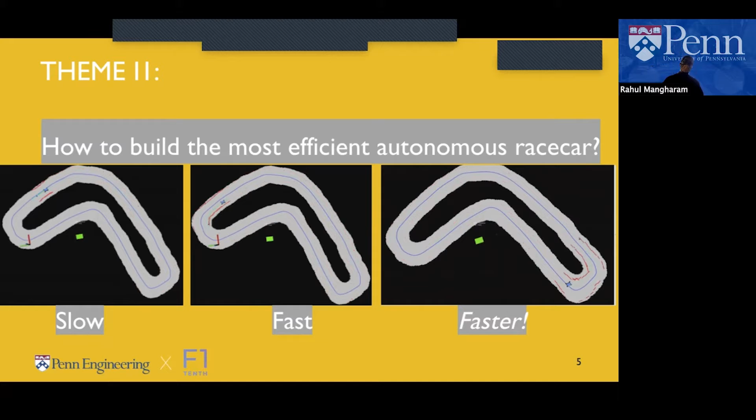The second theme is, well, in order to actually have high performance in these competitions, you have to have a very efficient autonomous race car, looking at the electrical, the mechanical, the perception, the planning, the control, the entire stack. Here we'll speak about how you automatically tune across this entire stack to come up, for a particular track, with the highest performant race car by design. This is combining the software, the hardware, the mechanics, and the racing strategy. And then how do you ensure that this transfers very well to different racetracks along the way?

Obviously, in autonomous racing, these are extremely expensive vehicles and very high stakes games. So you want to make sure your algorithms are crash proof, or to put it another way, you want to stress test and build a search engine to search for when this vehicle will crash, under what conditions, how often, and in which parts of the track. We want to stress test these planning and control algorithms with interactive adversarial agents.

In theme 4, what we look at—and this is a large DARPA project with MIT and Siemens—is that we don't always have to start a new design from scratch. We could mine previous designs. This research question is focused on how do we have AI-based co-designers for model-based design, or how do we combine previous designs to auto-complete new designs with new requirements.

So can I, if I'm Boeing, or Siemens, or one of these large companies that have been making diesel engines or turbines for many years, and I want to make a new one or a new drone, mine previous designs automatically and synthesize 80% complete designs with an 80% probability of success? How do I come up with these high performance designs, but in an automatic pipeline? This really uses a lot of machine learning to generate designs that exploit previous designs, but also explore new design qualities.

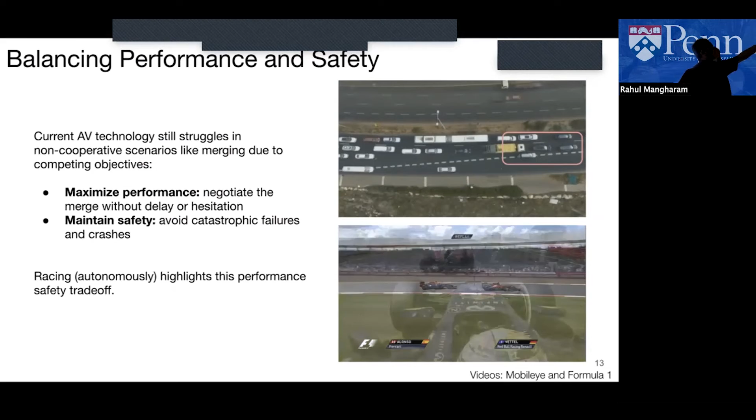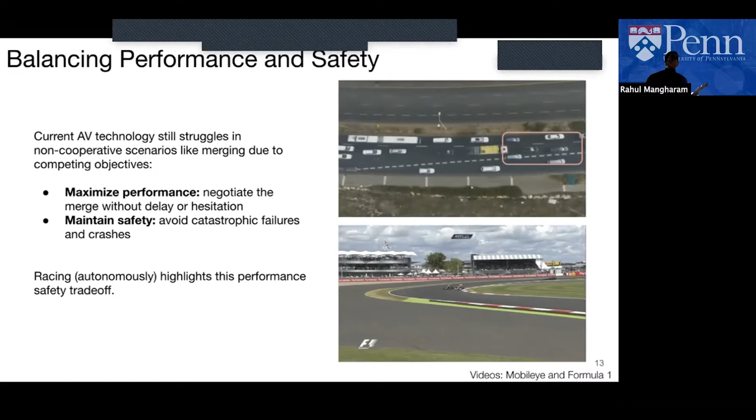If you look at our traditional example, this is a car trying to merge onto a highway, trying to get into the space between this truck and see if it can go through. It's a pretty mundane situation for us, and somehow, culturally, we're able to get through that. But from an autonomous vehicle's perspective, this is where it struggles in these non-cooperative scenarios like merging. It's trying to negotiate this merge without delay or hesitation, but if it's too conservative, it won't merge and will just stand there, which is risky. If it's too aggressive, it could cause an accident. So how does it try to do that?

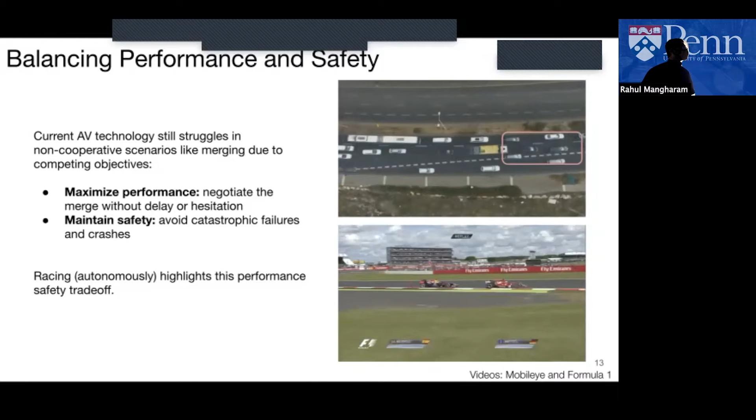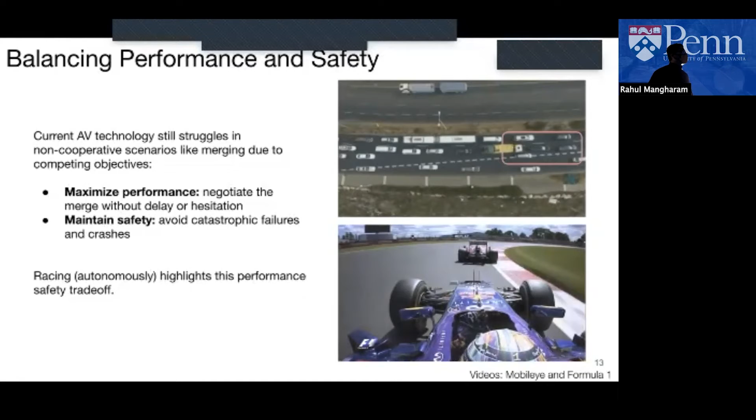But we want to look at not such a mundane situation, the most aggressive, where say we have Alonso and Vettel going extremely high speeds, extremely fast reaction times, extremely high cost vehicles, very dangerous racing at the bottom. These two drivers are trying to guess what the other driver is trying to do, and their guessing is so involuntary, it's just automatic. They have to figure out a strategy where they're extremely close to each other and they don't want to crash, but they still want to win this race.

So we focus on racing because it provides us this extreme operational environment. But the issue here is that crashing is very expensive. These are multi-million-dollar vehicles, driving at over 200 kilometers per hour, very dangerous.

Also, the sensors onboard an autonomous vehicle, like cameras, lidars, radars, IMUs, don't sense what is the opponent's intention, what is the opponent's strategy. They just sense very near-term things, the instantaneous behavior of the opponent, but not a behavioral model of the opponent. So we don't have sensors that can actually provide us that information.

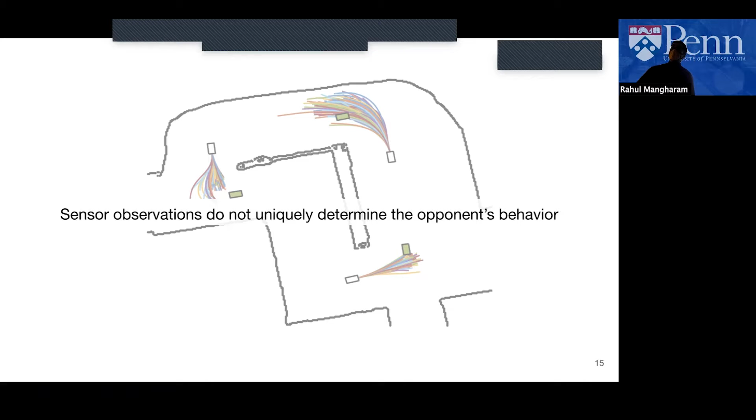What we want to know is what is this opponent's racing strategy overall and right now. We also can't just mine how these opponents raced previously, say on the Austria track or the Abu Dhabi track. Their strategies are secret, their vehicle components are secret. So we operate in a very low data regime — we can't just mine how these competitions happened in the past.

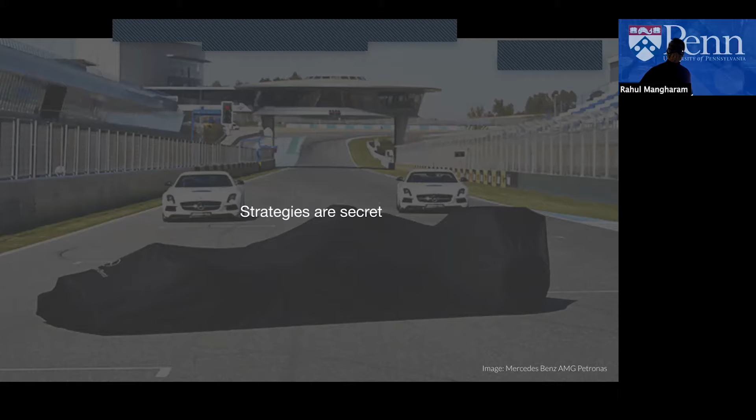So the overall idea is to learn some useful parameterization for this uncertainty set P, and then proceed as before with our RL formulation. Essentially, this is really trying to have some kind of model of the predicted behavior of the opponent under every situation as we drive. We want to parameterize that — parameterize how much progress we are making and how close we're getting to the opponent.

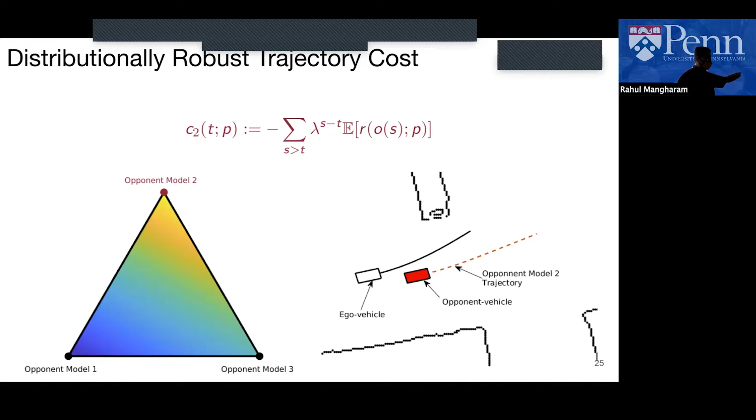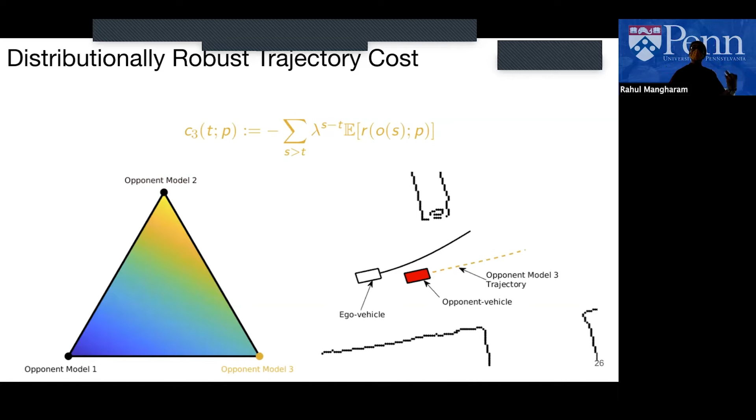And then I find the minimum cost path for that trajectory, but it's making a guess. Opponent model 2 predicts that this red agent is going to follow model 2's trajectory, and opponent model 3 has its own trajectory over here. So each of these opponent models has their own guess as to what the other agent is going to do.

But the other agent is not going to necessarily fit exactly one of the offline agents that we have. It's going to be some mixture of these offline agents, and there's also going to be some uncertainty since this is not a perfect fit. So essentially, we have this prediction in belief space, but we don't represent it just as a point prediction - we also have an uncertainty ball around that. That's what we mean by distributionally robust, because we have this ambiguity set uncertainty that we're taking into account.

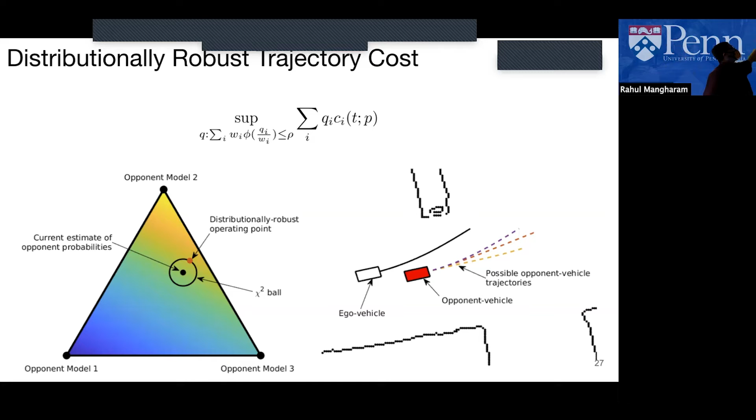And that's what we are maximizing in terms of our expectation. So essentially now, as we start to drive around, we're making a consecutive series of guesses - is it like opponent one? What kind of weighting is it of all our different candidate driving policies?

So, for example, if there are 10 possible opponents that we are racing against, and 100 possible motion planning goals that we are generating, we need to compute about 1,000 receding horizon costs just for this. Usually we are overtaking maybe one or two vehicles at a time, so it's not that high a cost here.

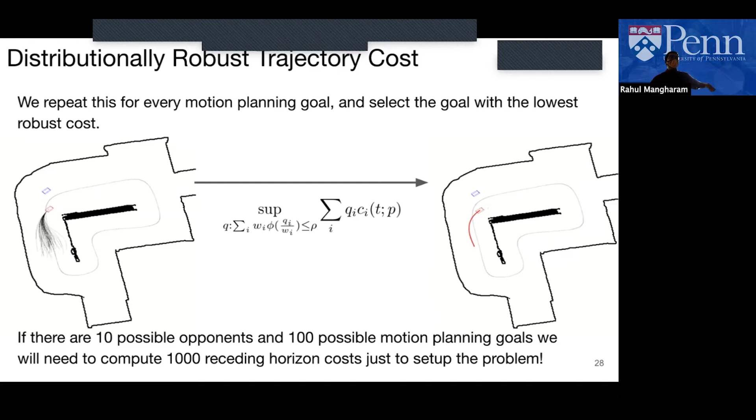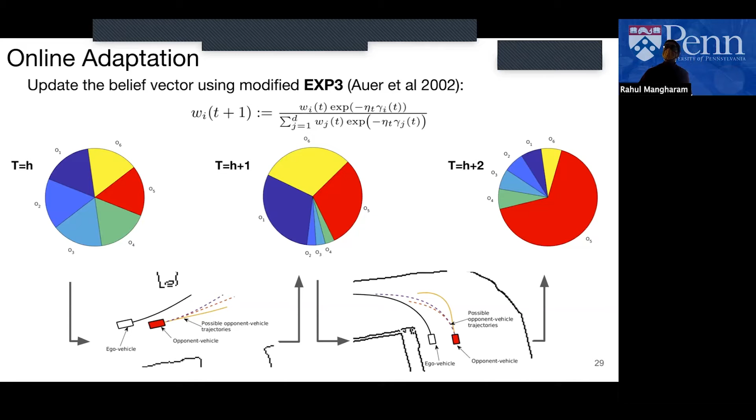What's happening now over time is that initially we have an equal weighting for all the policies that we generated offline. But as we continuously observe and correct for the weighting of how this opponent is driving, it starts to converge to a weighting of the different driving policies - say this opponent is more like policy 5, with some smaller weights for other policies. This allows us, over time with just a few observations, to shrink our uncertainty set, and then we can drive more aggressively in and around this opponent.

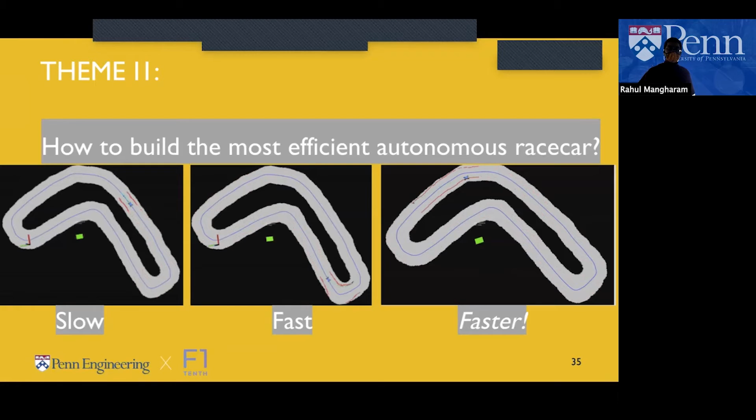That takes us to the next problem: how do we build the most efficient autonomous race car? This is based on the Tuner Car paper we had in ICRA on super-optimization for autonomous racing. That essentially means I have many different knobs—mechanical, planning-based, perception-based, and so on. These are just a few of the many knobs I have to tune this vehicle for a particular racetrack to drive as fast as possible.

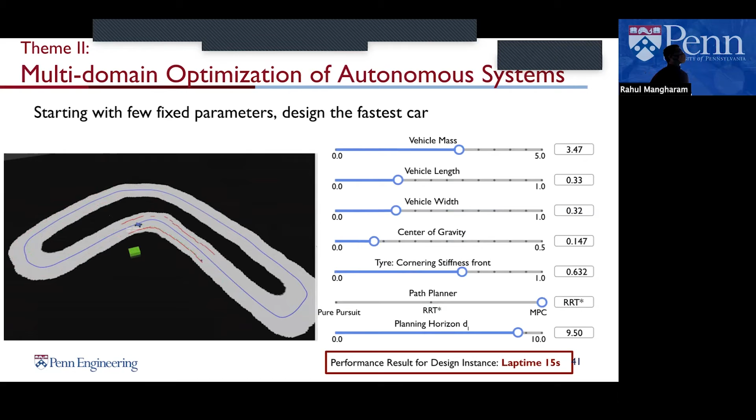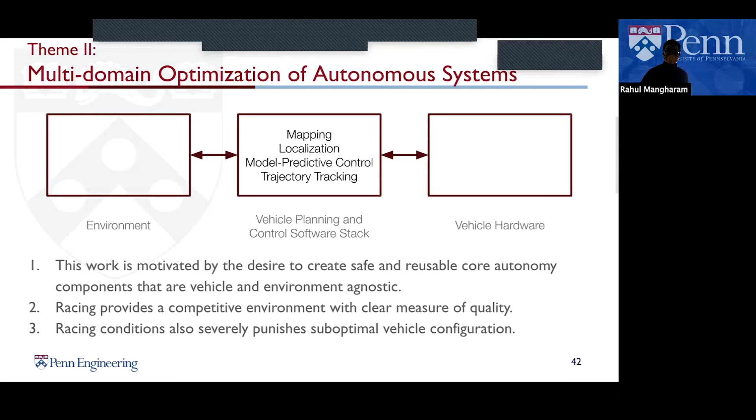As I start figuring out how to tune it, the lap time can keep going lower and lower, until I get to a vehicle that's drifting around the track. But how do I automatically do that? I want to have a reusable core of my autonomy stack, while the tracks and vehicles keep changing, and be able to optimize for any new vehicle that comes along.

I want to be able to just optimize this stack. That's what the Tuner Car approach did: minimizing lap time by taking over 500 parameters—from mechanical to planning to control—and mapping them to a single scalar value. This approach essentially uses evolutionary algorithms or gradient-free optimization, because these are very non-convex cost functions, and we have a very high-dimensional parametric space here.

So essentially by using gradient-free optimization approaches, these are like evolutionary algorithms. You can think of them as, largely greedy algorithms fall in these categories, in that they're continuously exploring and exploiting the search space of where you can find higher parameters with a lower cost, and they're evaluating them in simulation and eliminating a lot of candidates, then exploring the distributional shift in the candidates so far, and iteratively improving through this.

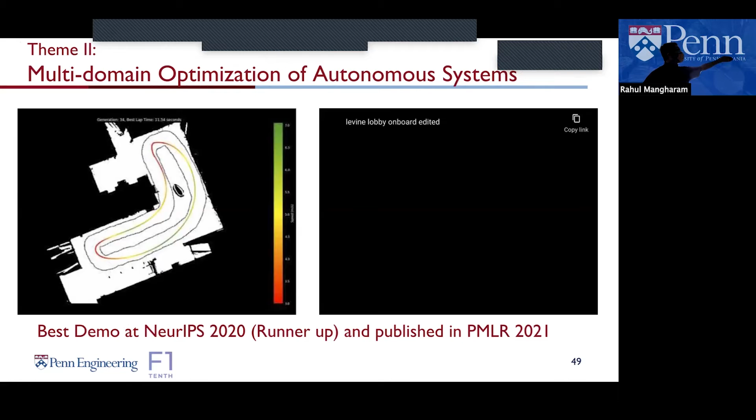And of course, the next step as we go through this is to run this on an actual vehicle. This is actually in Levine Hall, at the entrance, and we used this strategy and had the vehicle race around. Of course, it's going over a carpet, then over this grating at this end, so from smooth floor to rough floor. There is some sim-to-real gap, but it's a very small gap, as we can see from this generated result.

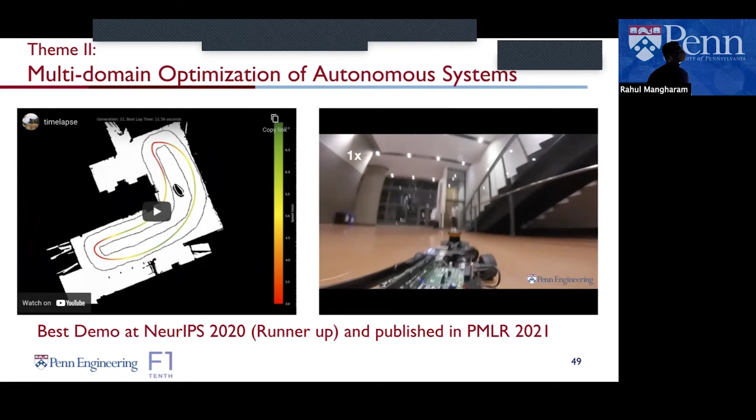And this work was published in NeurIPS and PMLR.

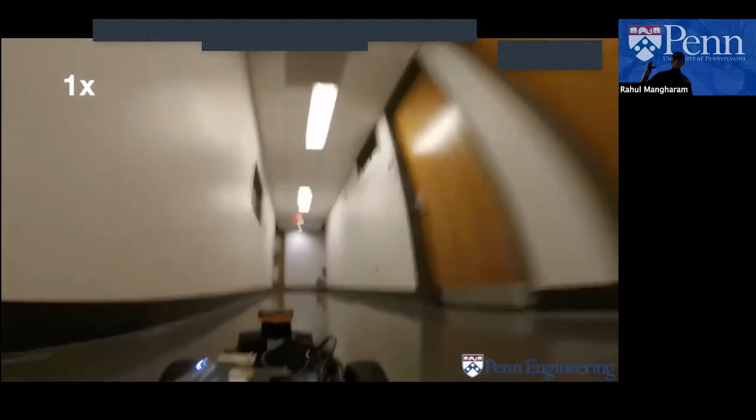And then similarly, many of you in the class are doing this loop around this track. This generated a very high speed loop that is comparable to the best of the second race that we had in the class.

So the next directions for this kind of work are really focused on bridging the sim-to-real gap, and also looking at multi-agent systems and how we actually do performance tuning, combining the first two thrusts for multi-agent scenarios, where I want to balance safety and performance, and also optimize my racing strategy both when I am around other agents and when I'm not.

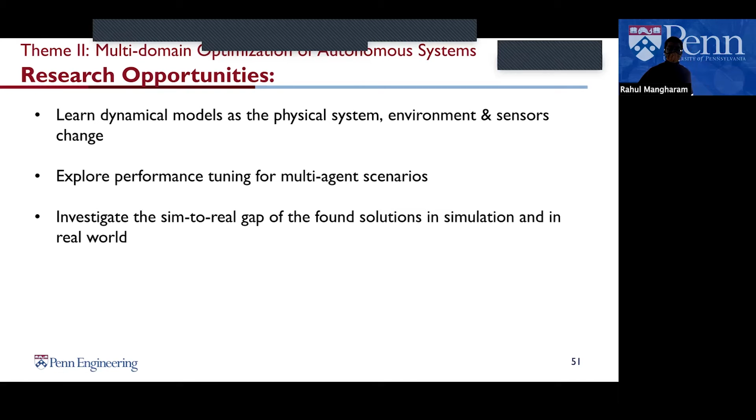Very briefly through the next two themes: there was this Indy Autonomous Challenge hosted in October last year and even in January, where each of these vehicles, I think, are over $350,000 and can reach peak speeds of about 200 kilometers per hour. And they wanted to go directly and race them head to head.

But in simulation, they found that of the 16 teams, 12 of them crashed within the starting line. They were like, okay, well how can we have a head-to-head race? Because we suck even in simulation. We don't have good enough motion planning and control strategies to do safe overtaking.

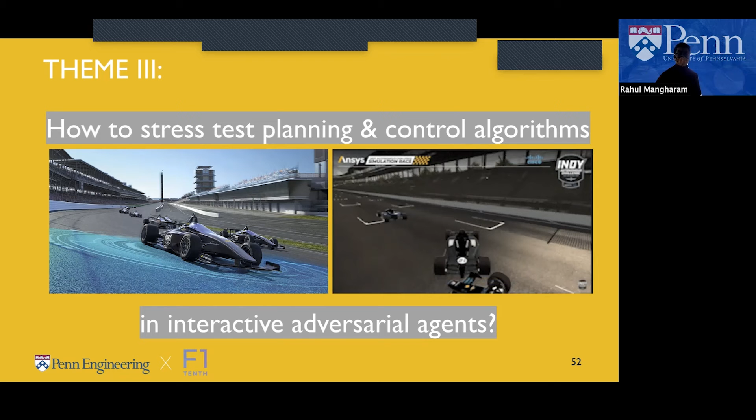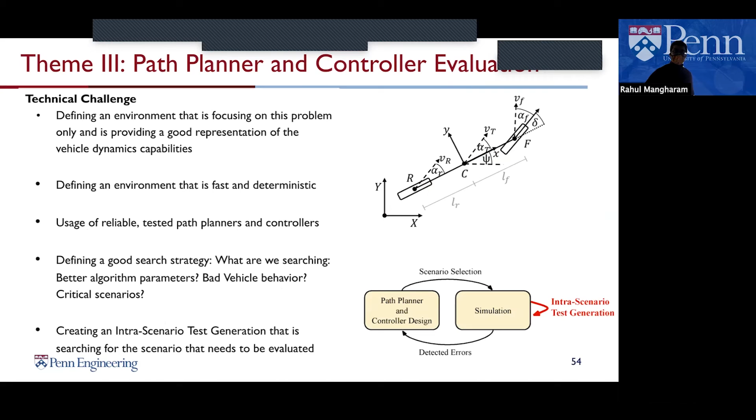So essentially we focused on how do we build a search engine that can efficiently search for crashes. Given a vehicle dynamical model and a whole set of different planners and controllers, how do we search along a given racetrack, where there are very different racing strategies to navigate around different curves of the track? And how do we know how well we can operate in the presence of other agents?

This is a very adversarial agent perturbation problem: as I'm driving, I place an agent at this point, driving at this speed, or at this point, and this point. We want a very efficient search, so we use RRT to place that agent in and around, iterating to see whether we can navigate around it based on where it is. Of course, if you place the agent right in front of us, that's not feasible, so we have to space it out sufficiently and see whether we can overtake it, or at least not crash into it.

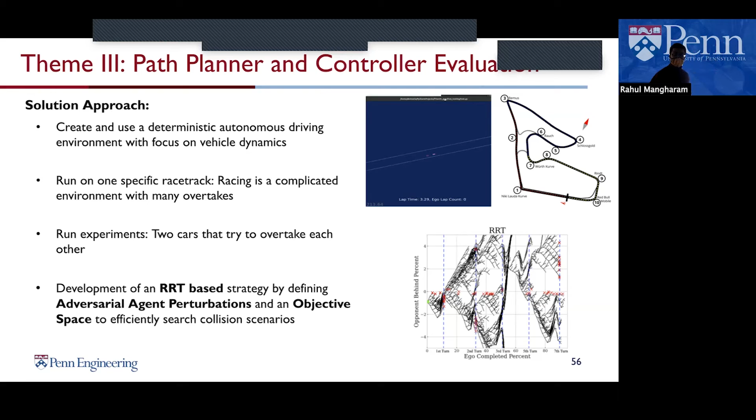So we're seeing whether we complete an overtake on this axis, and all these X's show where we crash. When we get the result, we can display this as a set of clustered crashes along each part of the track. We want to see, for example, whether we can navigate this turn that has a lot of crashes. We can also see on the track where crashes most often happen, since we're looking at all possible ways the other agent could be around us. We compare this across different planners and controllers to find the best combination, and how well they perform on different tracks.

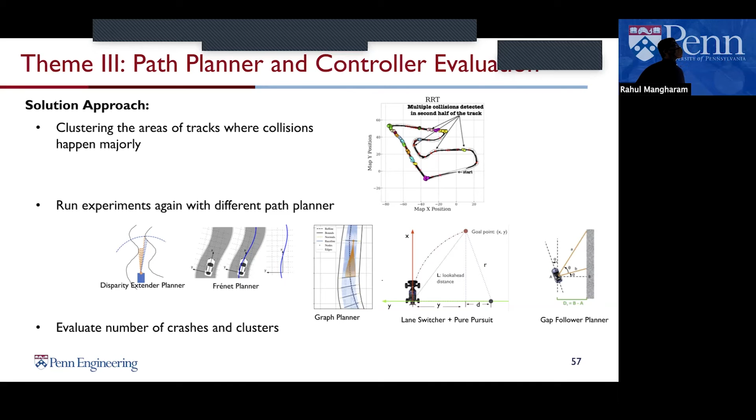This shows our purple agent trying to overtake the other agent, iterating through many different driving scenarios to see where it succeeds in overtaking and where it fails along the track instead of progressing. So this is about how we can efficiently search. But the problem with efficiency is that if you start here and keep crashing, you never reach further parts of the track because you can't survive along that path.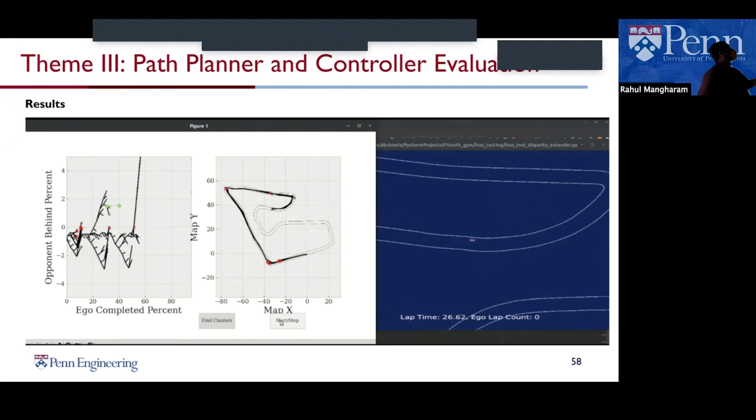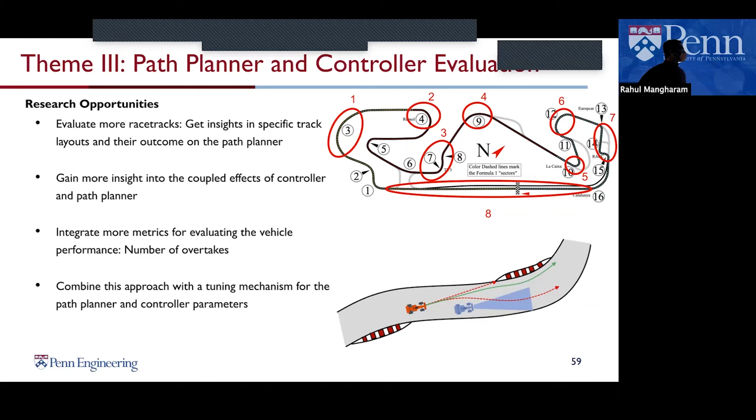So how do we search for all of these turns, and feed that back into our racing strategy? As we go forward, we want to look at racing strategies for each of these components, and how we automatically generate these strategies to lower the crash rate. There are many different ways to figure out efficient overtaking along each of these topological constraint environments. I'll skip the part on auto-generating.

Let me explain this at a high level. Here we're focused on AI co-designers for model-based design. This is an ongoing project that will continue for at least 2 more years. The idea is that if I have many previous designs, say of drones used for surveillance or tracking transmission lines, and now I want to build a drone for pursuit avoidance that has to communicate with others, it's a different use case with different requirements.

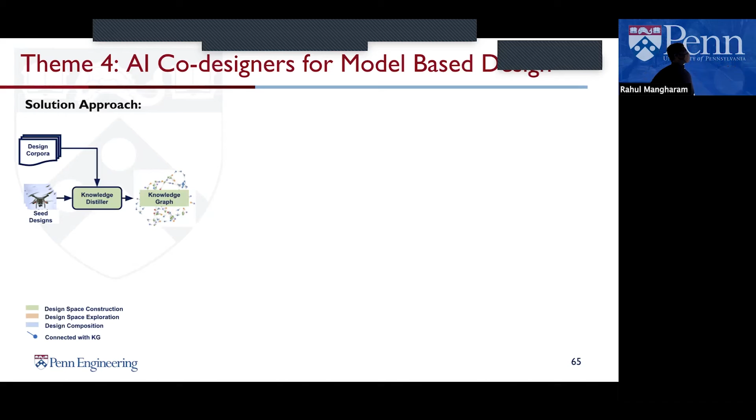They have to be more agile, so how can I mine these previous drone designs? How can I break them down into their components, batteries, flight strategy, planners, controllers, and also their electrical and mechanical aspects, and capture them in a knowledge graph? Then when I have a new design to make, how do I explore and search in this graph to come up with partially completed new designs?

So we're doing parametric and architectural exploration, comparing it with the seed designs, somewhat related to the earlier tuner car example, but this goes well beyond parametric searching. As we go through this pipeline, humans will say, okay, if you have a drone, it should have an even number of motors, and it should have certain capabilities and certain flight lengths.

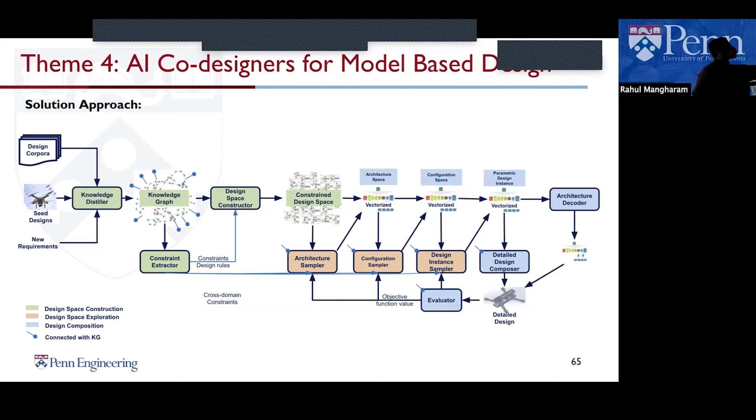So the human can input these sort of requirements. The human comes in, and say when it generates a series of possible designs, the human can eliminate a couple of them. Kind of like when Iron Man is trying to design a new system, and Jarvis says, how about this, how about this? He says, no, not these two, let's look at this one. So that's where the human is filtering these partially completed designs.

For the first part of this, we had a hackathon a few months ago where they gave us some seed designs where they had manually designed these different types of drone systems. And then we had to generate new kinds of drones for certain different benchmarks. So there were designs based on these seed designs, and then mining these seed designs. And then there were designs that just used a variational autoencoder and reinforcement learning that came up with new designs from scratch, and you can see there are all sorts of weird and interesting designs.

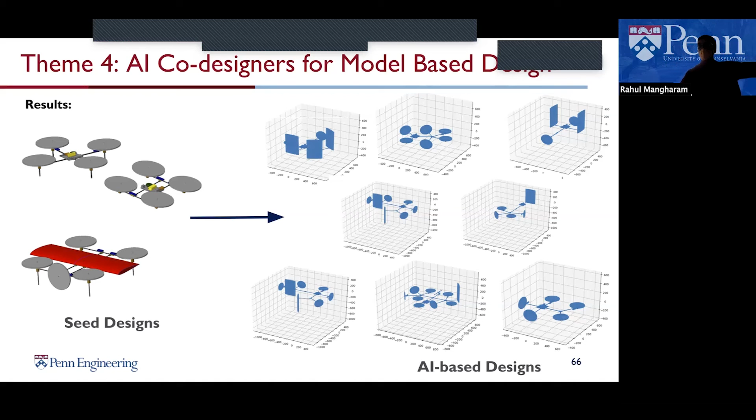These are all feasible designs, right? And then there were a set of benchmarks: how far can the drone fly, how well can the drone track around a circle going counterclockwise, how fast can the drone do this loop, and then how high can the drone fly. So there were all these benchmarks, and then we had to automatically generate and compete with all these other teams to see how well we could come up with solutions.

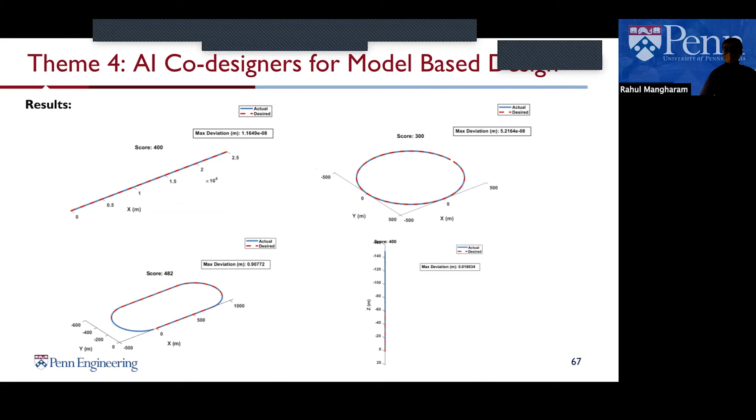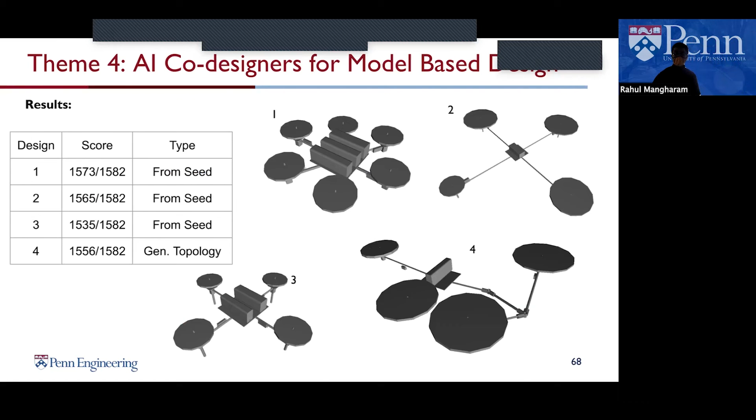So for how far a drone could fly, this was a heavy powered drone and could fly the furthest. This second design was very weird because it's optimized for how well this drone could fly counterclockwise. It figured out that the inner motor does not have to do as much work, so it actually had an asymmetric design, and the drone was just flying counterclockwise. If it had to fly the other direction, it would have to rotate, and it could only do that design because it optimized just for the benchmark, right?

So as we go forward with this, it's essentially about how we replace this entire process - like if you're using MATLAB Simulink as a model-based design tool chain, how can we automate many of the intermediate steps? And there are some very concrete ways to do that.

So just tying it back, the reason we focus on racing is because this distinction between safety and the metrics for performance are very explicit. If I'm driving from Philly to Manhattan and I'm 5 minutes late, people say, oh okay, he's 5 minutes late, at least he's alive. They don't even say that, right? But in racing, if you're even 0.5 seconds slower, you're out of the top 10. So that's like saying goodbye to your racing career if you're too conservative. We're also working at the limits of perception, planning, control, and so there's a lot of uncertainty, and a lot of our algorithms are focused on just that.

So just giving you a sampling of some of the research we've done so far. I'll spend the next 2-3 minutes on how you can get involved. There are a lot more slides.

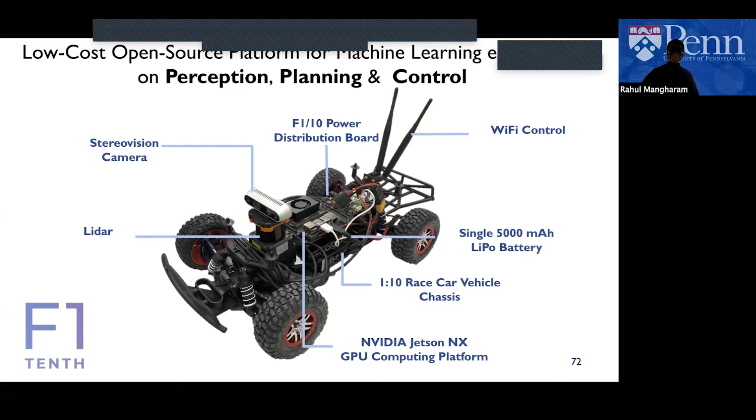I'll share the slides. We obviously have F1TENTH, that is a course we are offering this semester. Many of you are in this course or know about it. I'll skip over that. There are many projects we do with independent study on F1TENTH, and always reach out if you want to get involved in that.

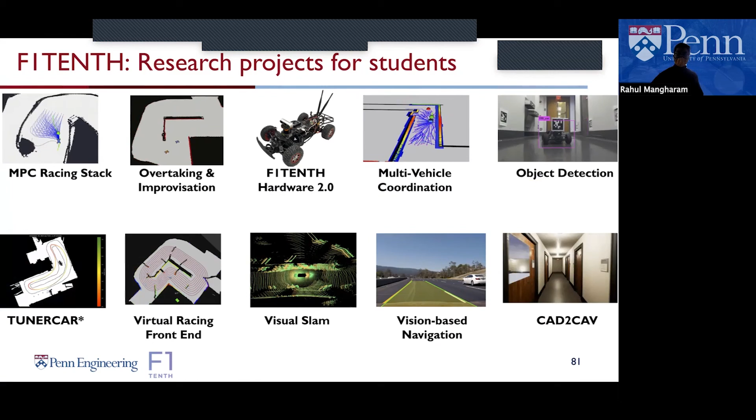And then we have many races. We'll actually have the ICRA 2022 race this May, and it's a big race. There are dozens and dozens of teams that have registered both for in-person and virtual racing. And there are over 60 university partners that are involved with F1TENTH, both in the US and worldwide.

And there are many other activities we have, like the Opportunities and Challenges with Autonomous Racing workshop that will be at ICRA. This is the second year we're offering this workshop. Last year there were over, I think, something like 700 people registered, and there were about 170 people attending at any time in the workshop.

One thing I want to introduce is that on campus now we have this AutoWare Center of Excellence. AutoWare is essentially the world's leading open source autonomous vehicle software stack, and it works on full scale vehicles. It's a non-profit organization, and everything it does is open source. Essentially, the whole idea is that anything that moves will become autonomous.

And so this is software that will power not just vehicles and trucks, but also logistics, warehouses, cargo systems, any kind of system like that.

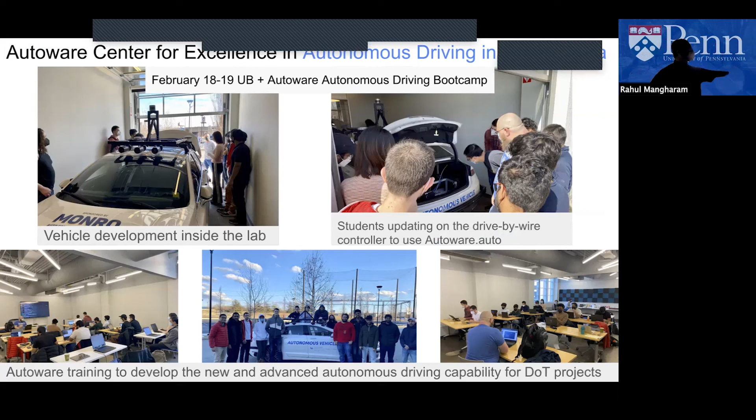This semester, in Feb, we had some experimental work to make this Lincoln MKZ autonomous. There was a workshop on the AutoWare stack, and work on the drive-by-wire system. Many of these are ROBO master's students, and there are many videos on how they were actually experimenting in the evening.

And just this one weekend, they got the car to drive with a joystick control, right? So as you can see over here, the car is driving around Pennovation, with LiDAR, GNSS, cameras—the entire stack is right there.

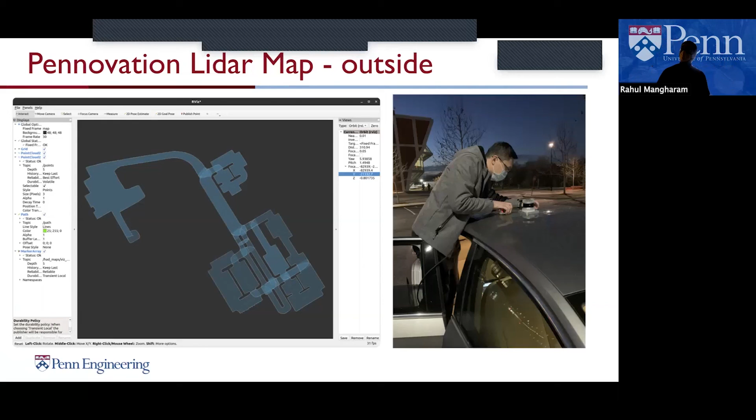Schumann and Zihao, two second-year ROBO master's students, built LiDAR maps for Pennovation, and then they also built semantic maps so that we can now navigate around Pennovation with the car.

AutoWare has over 60 industry partners and over 60 university partners, and they all contribute software and sensors and so on to the AutoWare Foundation. There are lots of activities within this, and from my perspective, as faculty working with students, this just gives us a lot of access to work on real stuff.

The other thing that we do is we have this Grand Prix, so come and attend it, participate in it. We also have this workshop—there's a great lineup of invited speakers, and it was super interesting last year, with a lot of top speakers from Berkeley, Georgia Tech, MIT, Stanford, and this year we have a lot of people from Europe too.

This is just one last project on autonomous go-karts. We have a go-kart that we're participating in the EV Grand Prix with. I shared these slides on the GRASP Slack also, but you can just see this is the track that we have to race on.

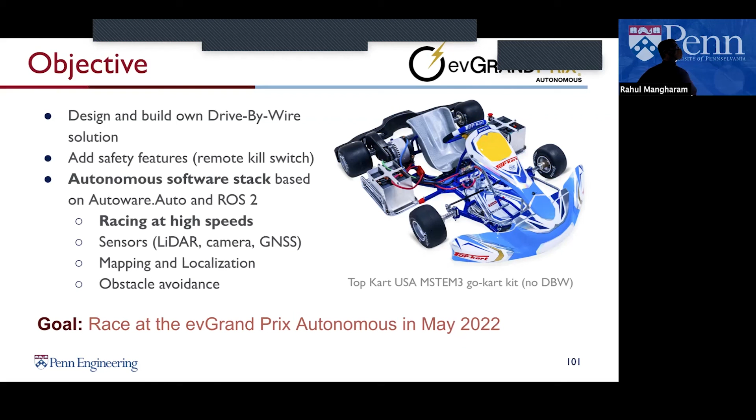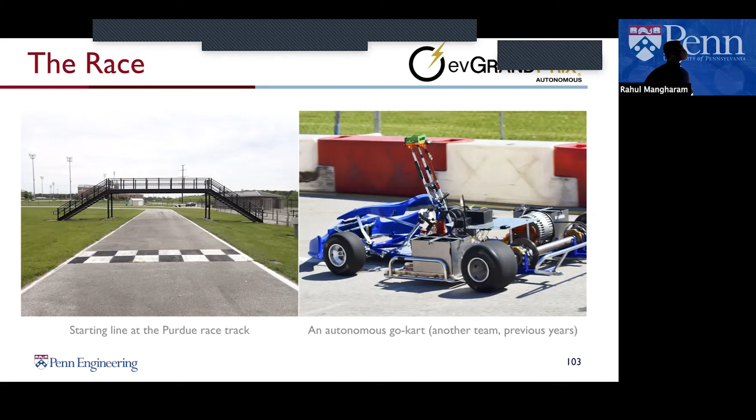It's a big challenge for us because we have to build this system from scratch, make it drive-by-wire, steer-by-wire, and autonomous, all in three-quarters of a semester. There's a really good team that's working super hard on this.

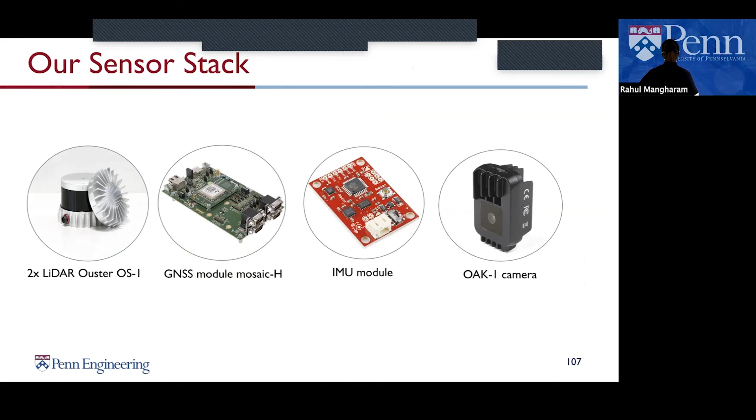They now work in Pennovation on Wednesdays and Fridays, and you can join this team either now or after the summer. They're building this whole stack, and each one of them has different modules they're working on, with different sensors on board that we're acquiring as we put them on the vehicle.

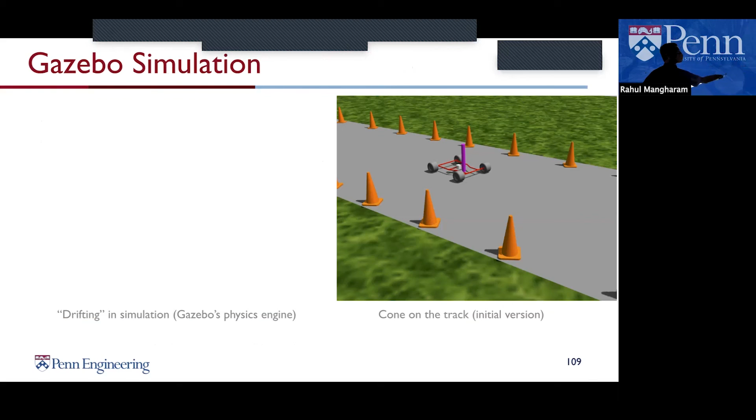As the track is there, they built a smaller circuit in simulation, and this vehicle can now even do some drifting along that. Essentially, this is all within the last three to four weeks of this semester—this is all fresh material.

This is actually our internal team update slides over here. You can see this vehicle, very tiny over here, but it's doing some basic center line following along the track to get the simulator working.

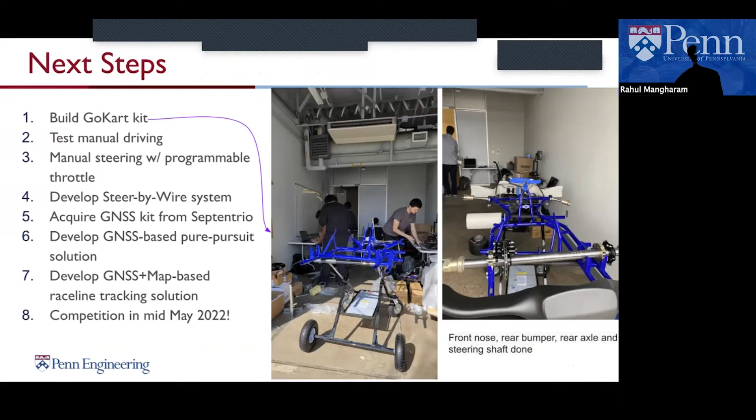And then there's the perception side of things—cone detection and navigation along that. You can see there's a lot of room for improvement, and it's improved over the last week, so now the team is in the process of building this. This is from last week and so on.

So just to wrap up, there are lots of opportunities for everyone to get involved in autonomous racing, autonomous vehicle development, whether on the research side or just getting hands-on experience. And that ends the talk. Thank you.

All right, thank you so much for presenting your work, Dr. Mangharam. Really thought it was interesting. We are a bit over time, but I do want to open it up for questions in case someone really had questions that they were itching to ask, both online and in person.